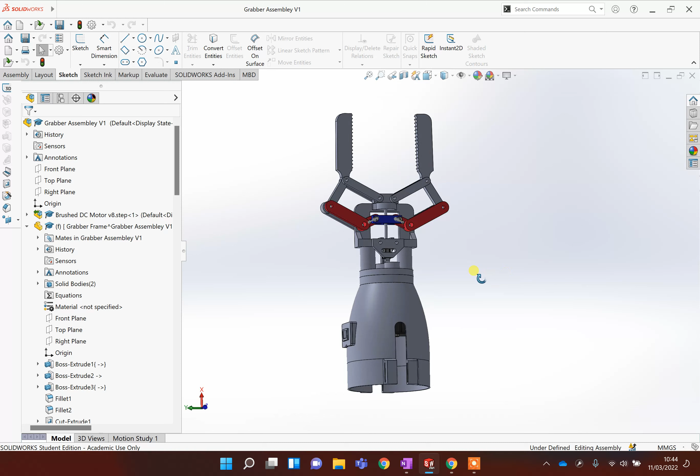Before we go ahead and do this, open up the part that you want to get a drawing of. If you want to do the whole assembly, you need the whole assembly open. If you wanted just an individual part, it's important that you open just that separate component before doing this process. But whether you're doing the whole assembly or just a part, the method is the same. The very first thing you need to do is ensure that your views are all aligned.

What I mean by that is go up to your little view cube and just click on a flat face. Now, there's a problem with my model at the moment. When I look at it from the front by clicking that front face, my model doesn't appear front ways on. This happens quite often with assemblies, and the problem is if I then make a drawing of this, all my drawings will be wonky, like this view here, and it's not how an orthographic should look.

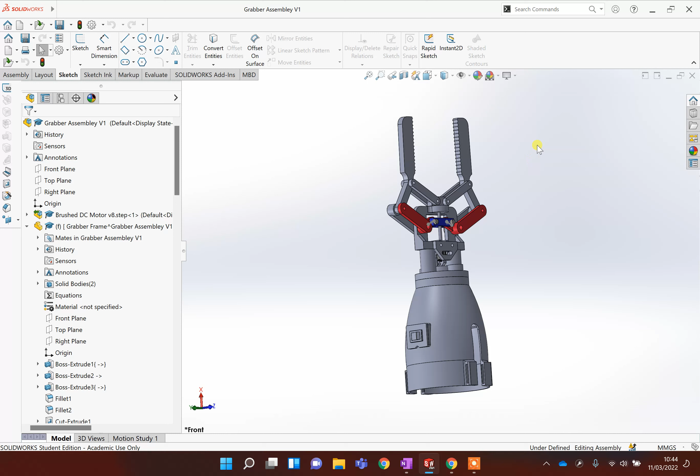But we can change that, thankfully. To do that, you just find a flat surface on your object that should be front facing, say this one here, and right click on it. Then you've got this tool that says normal to. What that will do is adjust your view so you're looking at it dead flat on, normal to that view.

If you now go up to your cube, click the little arrow, you may need to click this little arrow to the right that says more options, and you'll get a separate window appear. Sorry, it's just disappeared. So let's do that again. So this one, arrow for more options.

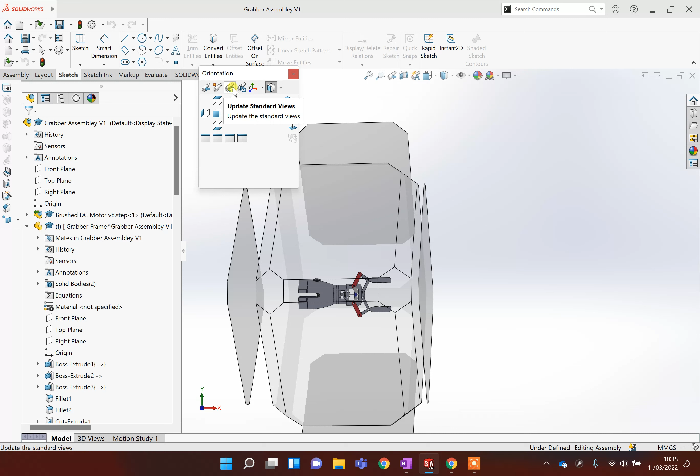You've got this option, update standard views. Click that and it will say, select the standard view you would like to assign the current view to. So I'm just going to click front. It will say changing it, blah blah blah, we'll change, just click yes, that's fine. Now what happens is everything is orientated to that. So that is now my front.

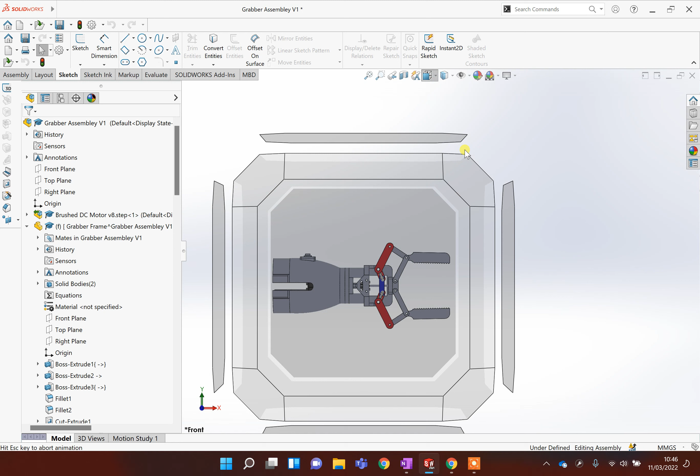If I go to my view cube and rotate it and click on this side, you can see I'm looking at it dead end ways on. And if I look on the top, I'm looking at it from the top, as you would expect. Everything is aligned. It's really important you do that before you go on to doing the drawing.

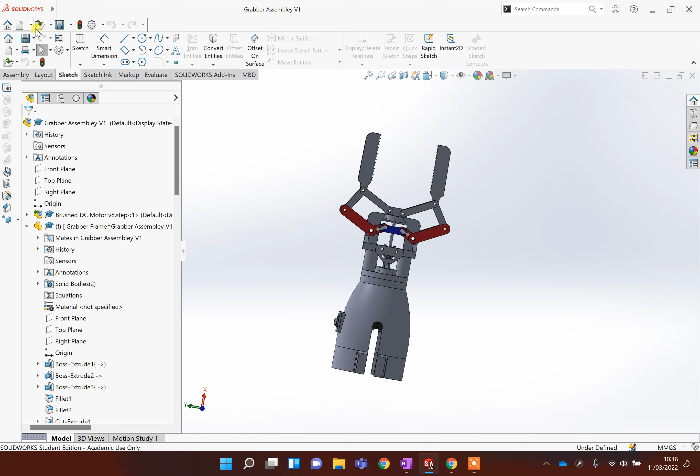Okay, right, once you've done that bit, save your work. Always a good idea. The easiest way to do this is to go up to the file menu, and you've got an option that says make drawing from assembly. If you've got just a single part open, it will say make drawing from part. So I'm going to click make drawing from assembly.

I would recommend browsing and choosing A3 with 'land' in the title, which means landscape, open that and then click OK. Just because this will suit the format of the PowerPoint that we're using better, because it's the same orientation.

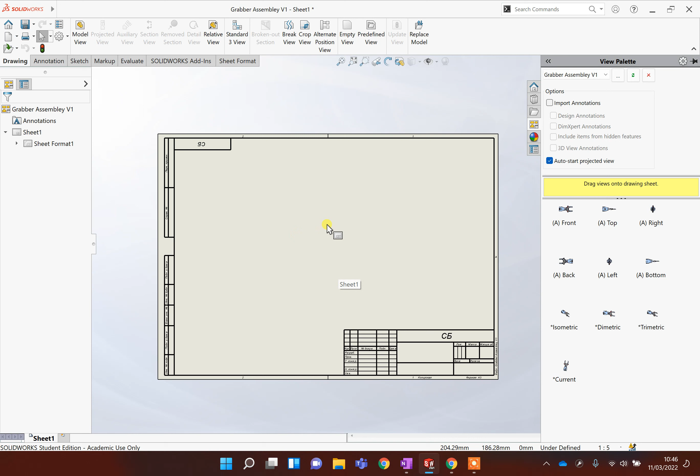All we're going to do now is choose our first view. It should show them on the right-hand side. So I'm going to pick front, and all you do is drag it out. Don't worry about the size of it for now, because we can change that in a minute. You'll see if you move your mouse off to the right, it will give you the top-down view.

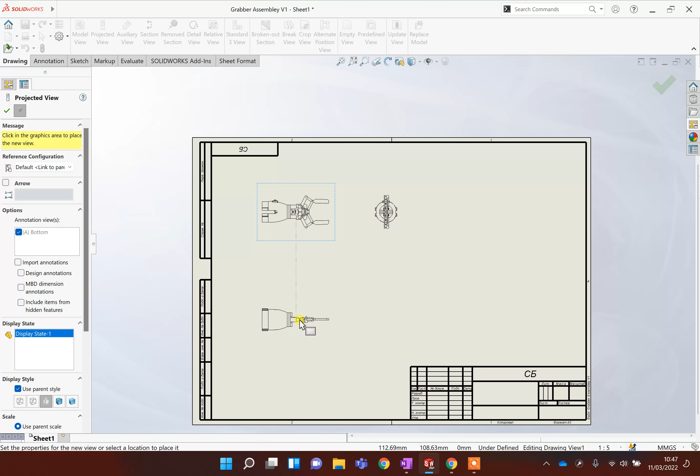If I move down here, it will give me my side-on view, and click. Then what we like to do is put in an isometric, a 3D view as well, because that helps engineers visualize it in the third dimension.

So we click and place that. You only need 4 views, so when you've got 4, just click the tick up there. The idea is that if you've put sufficient dimensions on all 4 views, you should be able to tell from one of these views any information you need.

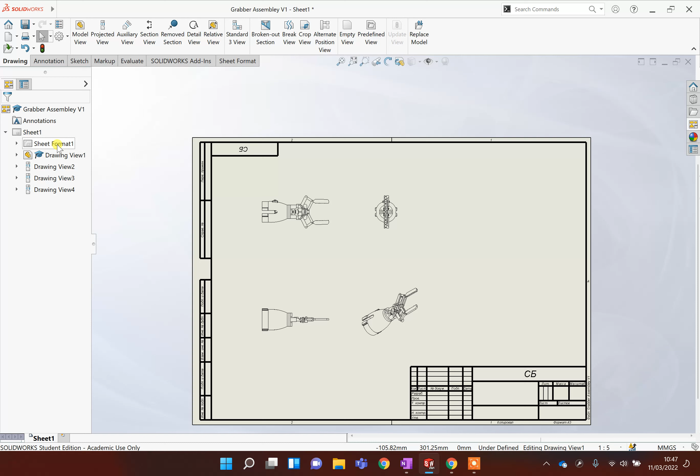We need to make this page a little bit easier to work with. First thing I'm going to do is delete this border and stuff. Now in industry you'd keep that and write who did the drawing, when they drew it, when it's got to be made by, but we don't need that for your PowerPoint. To get rid of it, right click on sheet format and choose delete, then click yes. That'll make your page a bit nicer.

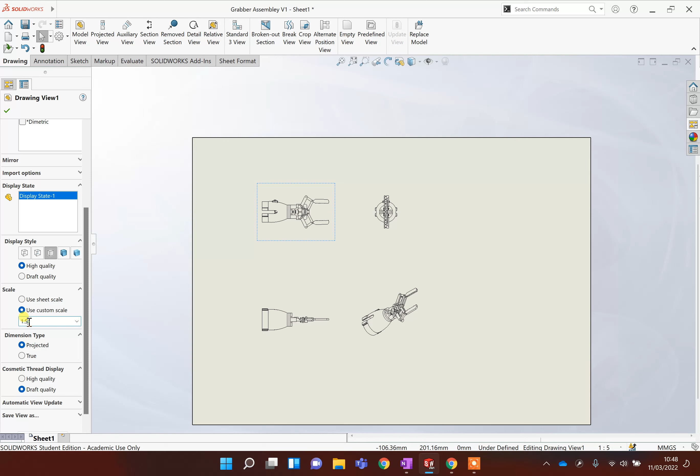Now the problem is these drawings are done to scale, and that scale isn't right for this page, it's zoomed out. If you click the original view, just in this border area, you'll see options on the left, and if you go down, it's set to use sheet scale at the moment. You can also choose a custom scale, so I'm going to try 1:2, which should make it slightly more than twice the size it was before.

Now if you pick the original view, the very first one you placed, you'll see the other 3 views all change their size in sympathy. If you're happy with the scale, click the tick. If you're not, change it.

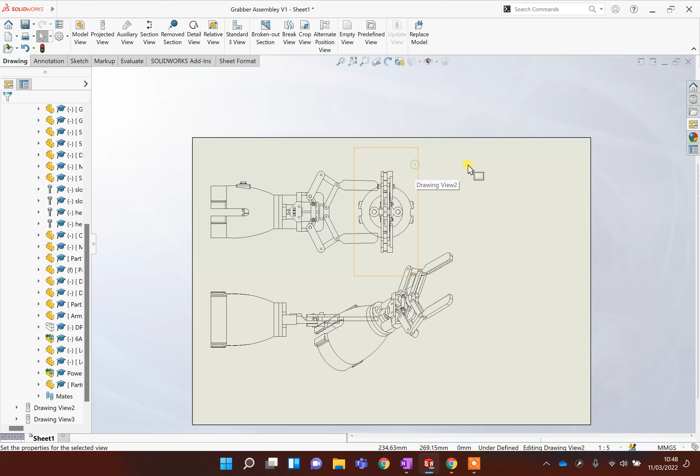You may need to drag your views over. All you do is hover where there's a dotted line and pull it along. So let's try that again. There we go, here. We want to space them equally on the page.

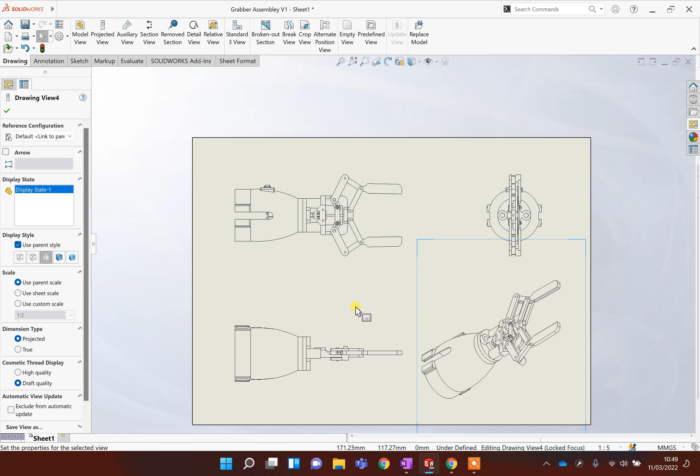It's important that the 3 views on the left are all the same scale, but if you didn't have enough space with this third one down here, you could click on that one on its own and then change the scale manually. So you could do one manual scale. I'm going to make that 1:4, just that view. That looks a bit better on the page because all my dimensions are going to go on these 3 drawings. When you've done that, click the tick if you need to.

What's really cool, by the way, if you were to go and modify your model, like change something, the drawing will update automatically. So all the geometry here will change, and you can just print it off again, which is really handy.

Anyway, we need to put some dimensions and annotation on here so that an engineer or manufacturing facility could follow it. So annotation is all done with the annotation tab.

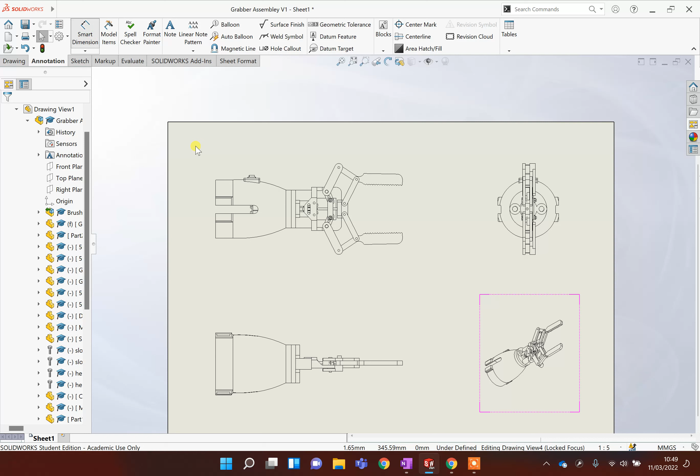First thing we're going to start with is dimensions. Smart dimension is the one you want. There we go, smart dimension. For your coursework at GCSE level, you just need to put on the major dimensions that would help people build it. So I'm going to click here and click here, that shows how big that is. That's fine, click the tick. Sorry, my computer's very slow, it's trying to do a video at the same time.

Maybe I want to know how long this part is from here to here. So smart dimension, do the same, click, click, place your view. You can override the value, by the way. So if we knew we wanted this to be 130, for instance, we could just click override and type in 130, which is really handy.

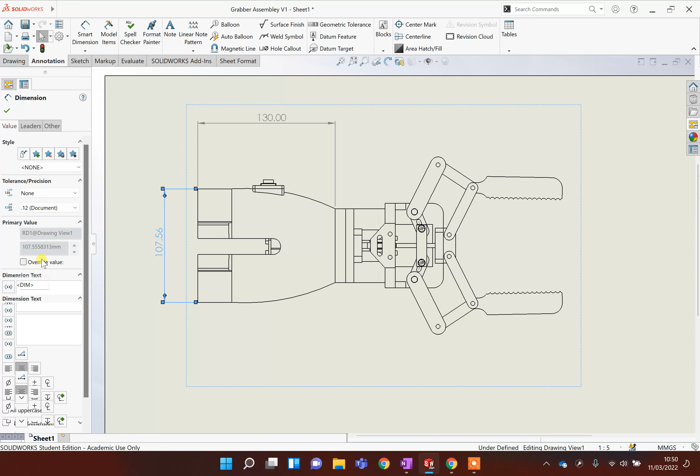So obviously we might want to do the same on this one, round it up to what would seem like a more sensible manufacturing number. I don't know, 108. It's quite handy, but obviously if it needs to be the dimension it does, then don't change it.

If you want to dimension something round, it's the same process, smart dimension, but just click on the round thing and move away, and you'll see it produces that little diameter symbol.

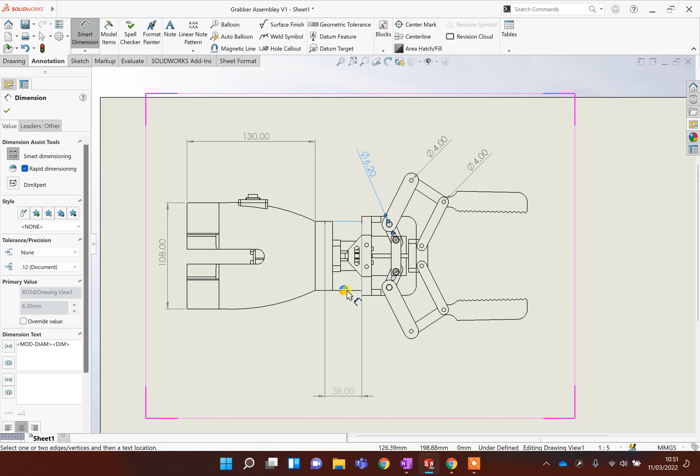So we know that hole needs to be 4, that one needs to be 4, this one needs to be 6. All we're doing is going around putting key information that is helpful for building this product. I'm not going to do all of it - just Control Z if you make a mistake.

But what I am going to do is spread them around different views. So for instance, this view is no good at telling me how thick this piece is. I can only tell how thick that material is by drawing on this view. So I'm going to click between here and here, so I know that that is 8mm thick.

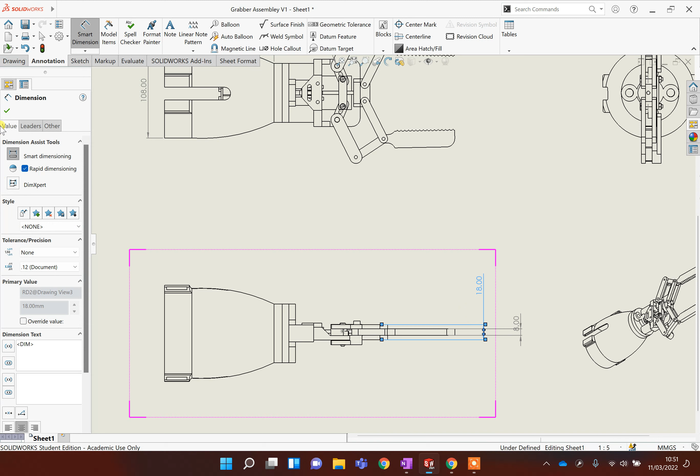And I'm going to click between there and there, and again bring that out and make sure your dimensions are in a place where they're visible. Click the tick. Again, from the front, I might not know what diameter this is.

So I'm going to just put my smart dimension on here, click on that circle, I can select it. There we go. So I know it's a radius of 54.12.

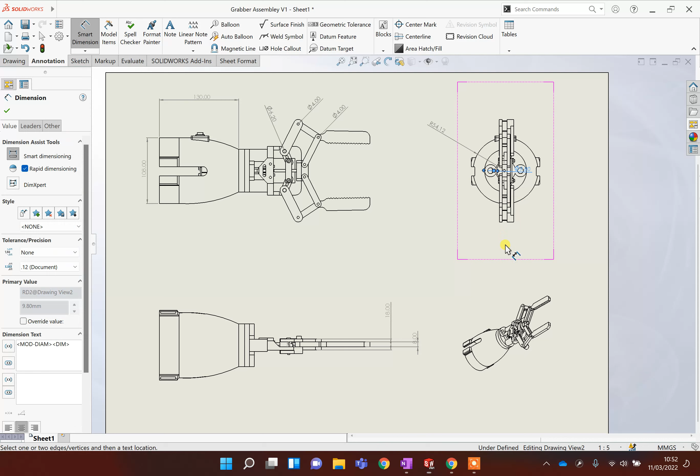Maybe I want to know how far apart those 2 holes are. So I just click the 2 holes. Oh, this is painfully slow, I do apologise - sorry, I have to do that again. If you want to show how far between 2 holes, you just click one circle, click another, there we go. So I know that the distance between those 2 holes' centres is 50.

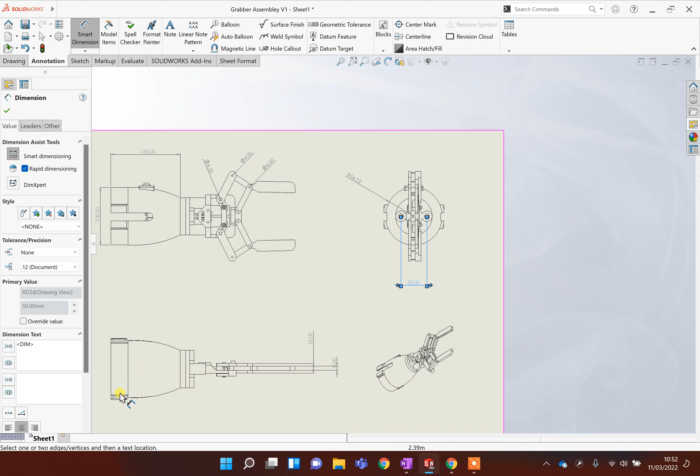And basically, go around your model and put in as many dimensions as you can across the 3 different views to show what sizes this model should be, so that someone could have a chance of following in the workshop and building them. Final thing, I wouldn't bother putting dimensions on this 3D view down here - you don't need to do that.

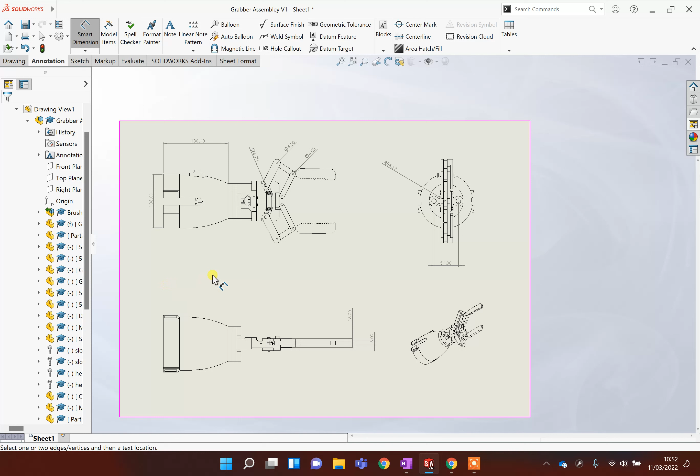But what we do need to do is perhaps add some basic annotation and other information that might help with the manufacturing. So with my robot grabber claw here, it's all going to be 3D printed. So we've got notes up here under the annotate tab - we've got note. Again, super slow.

You can choose your type of note. I want one that's got like a leader, an arrow on it. So I'm going to click that, and I'm just going to click where I want my note to point to. So I'm going to point it to there.

Click down here, and then type what I want it to say. So I'm going to say 3D printed PLA, 0.2mm layer height, whatever. That's just instructions to whoever's manufacturing it.

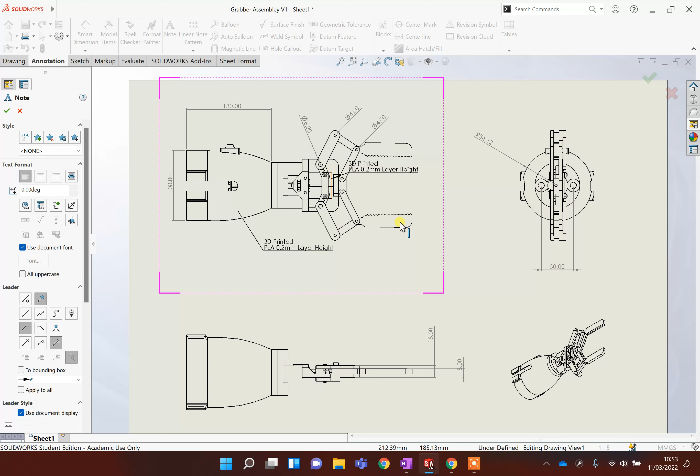I might want to go around and go, right, well, I could laser cut these bits, so I'm going to put another note on here: laser cut 8mm perspex.

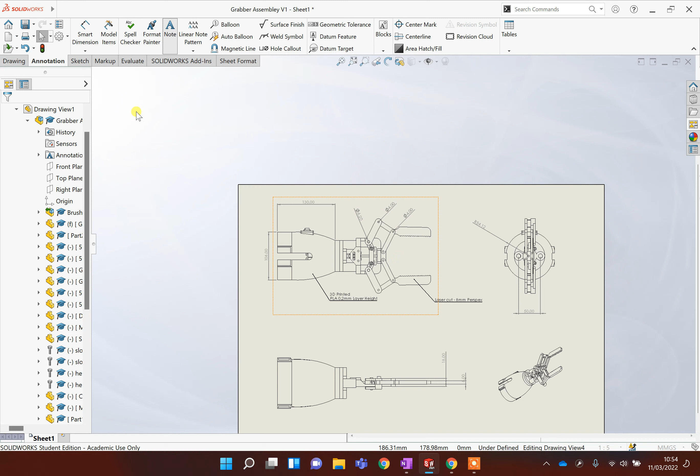And I might go, these are just holes at the moment, where in real life they'd actually have bolts in them, so I might put another note on. What kind of note? I want the leader one. So click on that bolt hole, bring it down. That's going to be M4 bolt with nylock nut.

So I'm just putting information that would help people build this and assemble it. And again, distribute that around your view. Remember, this is supposed to be a plan to help someone make it - it shouldn't necessarily be explaining how it works or what happens.

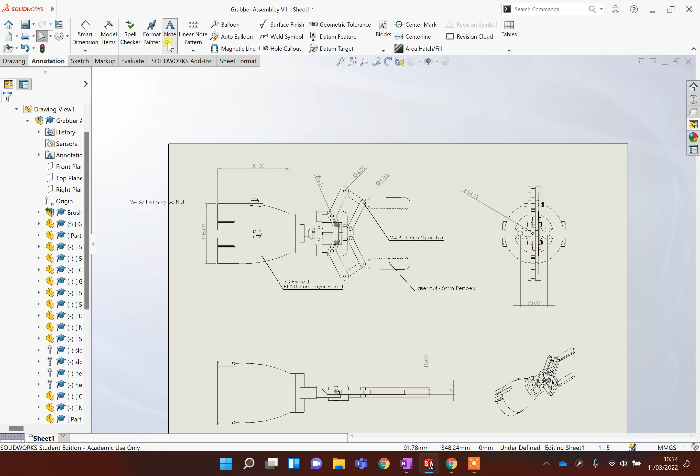The more information you can put on, the better, but you don't want to overcrowd your view. You might also want to put a title on. Under note is the easiest way - just do a note, but without a title.

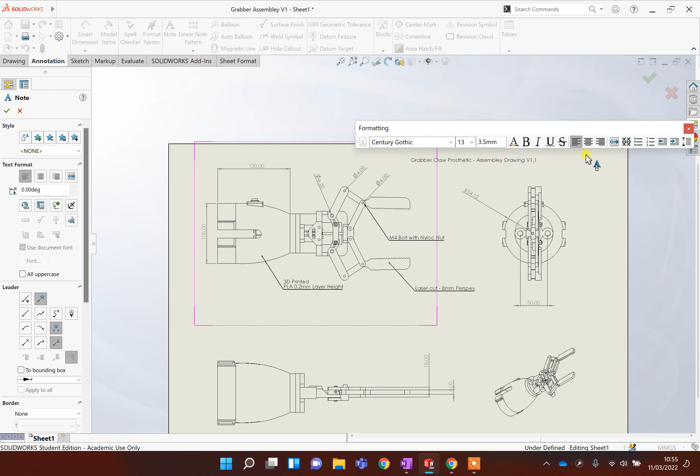Just click anywhere to type a regular note. So this could be: grabber claw prosthetic assembly drawing version 1.1. Put that up in the top right. And basically that's it - that is the process of producing a working drawing.

I wouldn't call this finished. I'd say there's still plenty more dimensions I need to put on here. There are some other things that may be useful for you to do.

If I double click on this view, you see these options over here, just to show you what they do. You can color it in, which might be quite nice to bolden the page. You can color it without lines. You can click this one, which shows hidden detail.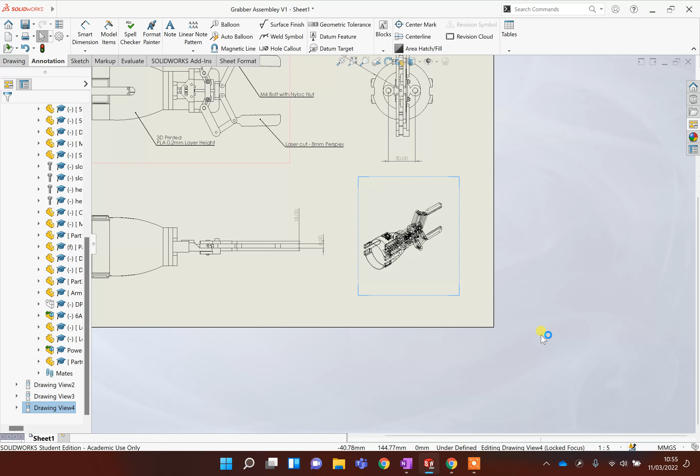Beyond that, it's just a case of getting that into your PowerPoint. I'll leave it down to you how you want to present it. Get the scale, get the dimensions, get everything done. Make sure you save it. And then the problem with importing it into your PowerPoint is it can look a little bit washed out if you just do a print screen.

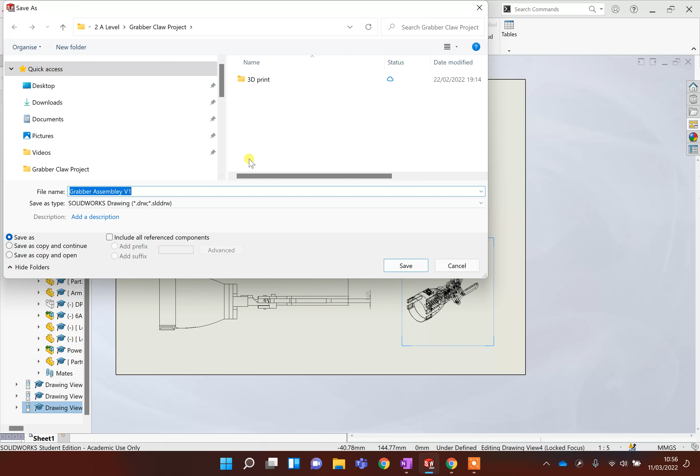When you save, you can go to Save As, and I'm just going to put this in my documents so I can illustrate it. You can save as a JPEG. The reason I'm going to show you to save it as a picture is when we put that into PowerPoint, we can get rid of this moldy yellow background and make it look really professional.

So let's load up PowerPoint. I'm at the limit of what my computer can do here. It's grinding to a halt.

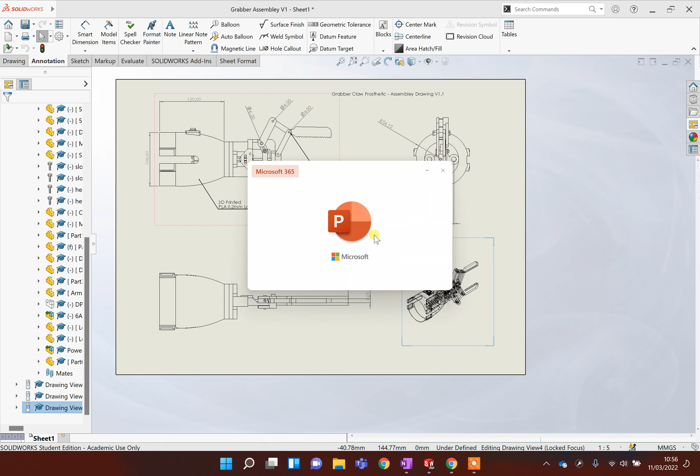Okay, so we've got our page. Now if I insert, rather than doing a print screen or a Windows snipping tool, if I insert that picture - insert picture from this device. Downloads... where did I put it? Documents. Grabber assembly, there we go.

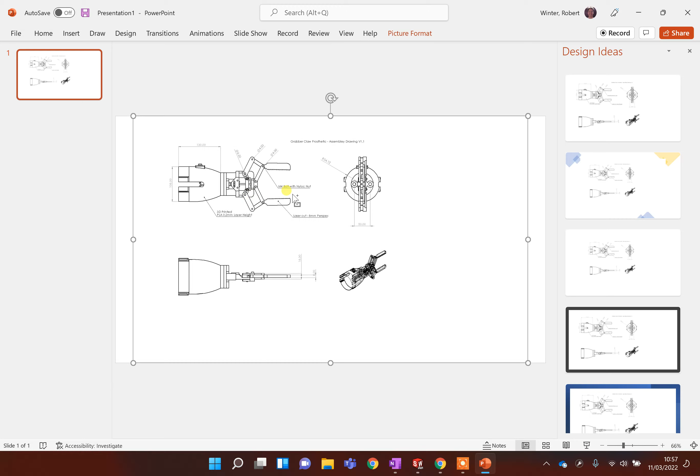Insert. Excellent. In fact, what's even better about doing it as a JPEG, can you see it's automatically cropped everything? It's automatically got rid of that yellow background and everything's in a nice high resolution.

Obviously, you would want to then perhaps select this picture format, crop, and then use the cropping tool to make this the right size as the page. But if your page is set to A3 in PowerPoint anyway, it should fill it up perfectly, okay?

Now, how much do you need to do? It depends whether you're doing GCSE or A-level. I would say at GCSE, I would definitely do one of these for the entire assembly, and I'd probably then pick maybe one or two really key parts - say like this lever here, or this tunnel section here - and then do another dimension drawing for those bits just on their own. So you have maybe 1 or 2 pages of working drawings, okay?

But that is the method. So I know that's quite a long video, but you need to produce that. And at A-level, I would say you possibly need to present a working drawing for each of the component parts you're going to make within reason. But it's fine to include several parts on one page.

I can't possibly cover everything in this video, but that does the basics. So good luck, get your screenshots, follow those tips. And this really is a big mark earner, by the way, whether it's GCSE or A-level. Presenting your work like this, it's your CAD model, you spent a lot of time doing it. Get the marks that you deserve by handing in these pictures.